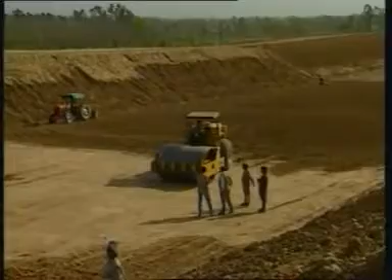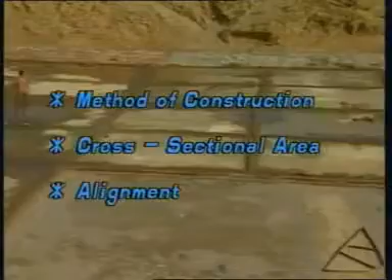This has resulted in human intervention with the natural channels and the development of artificial channel networks. These channels are classified according to their method of construction, cross-sectional area and alignment. The canal is a long and mild slope channel which may be lined or unlined.

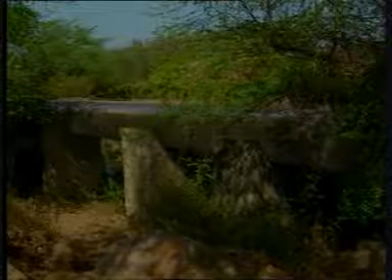The flume is a channel usually supported on or above the surface of the ground to carry water across a depression. A channel having a steep slope is called a chute. If the drop in elevation occurs in a short distance, the chute is then called a drop. A covered channel flowing partly full to drain water across the highway and railroad embankments is called a culvert. It could be rectangular or circular.

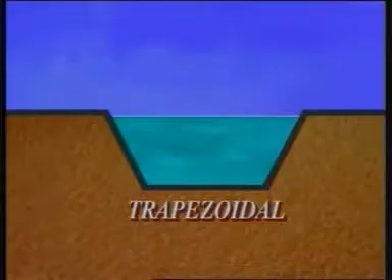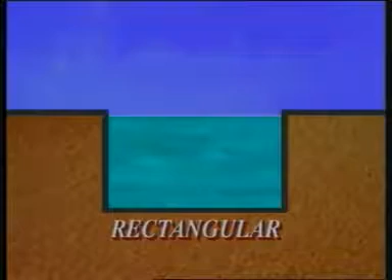You might have noticed by now that these artificial channels are designed with regular geometric shapes. The trapezoid is the most common shape for channels with unlined earthen banks. Generally, it has stable side slopes. The rectangle. Channels having rectangular cross sections are built of stable materials such as lined masonry, rocks or timber.

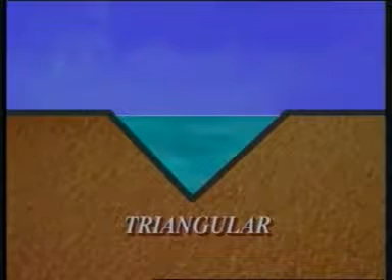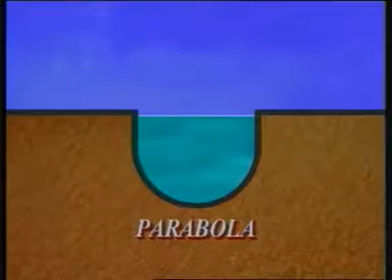Triangular sections are used only for small ditches, roadside gutters and laboratory works. The circle is a popular cross-section for sewers and culverts. In practice, other shapes are also used, where the sharp corners are rounded off. These are parabolas, round-cornered rectangles, and round-bottom triangles.

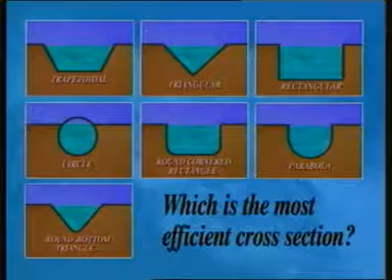Now the question is, which is the most efficient cross-section? The efficient cross-section is the one which, for a given slope and area, has the maximum carrying capacity. For such a section, the wetted perimeter will be minimum and hydraulic radius will be maximum. For an open channel, the semicircle is the most efficient cross-section.

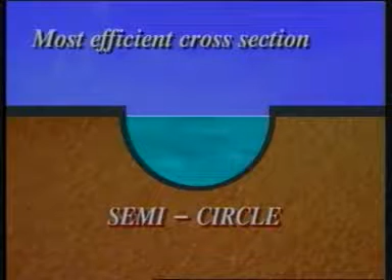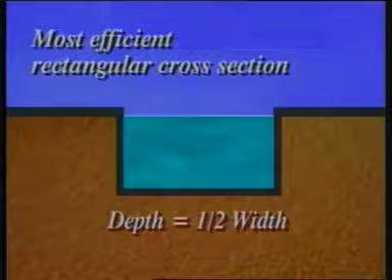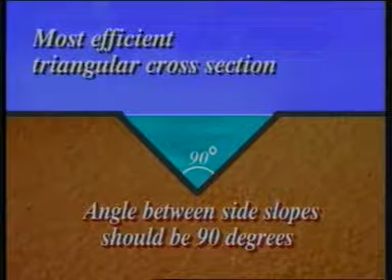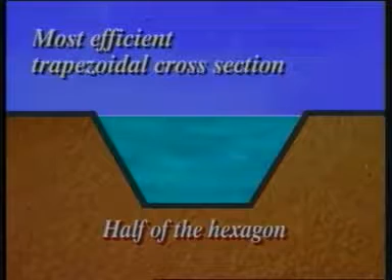However, if the rectangular cross-section is chosen, it will be half of a square, that is, the depth equal to half of the width, to make it the most efficient cross-section. If the cross-section chosen is triangular, the angle between the side slopes should be 90 degrees. But in practice, trapezoidal sections are mostly used to carry large discharges. Half of the hexagon is the efficient cross-section in this category.

The channels are aligned so as to permit gravity irrigation in maximum possible areas. The alignment should be such that it reduces the capital investments and maintenance costs and saves the transmission losses. Let us understand the alignment of canals with the help of a model.

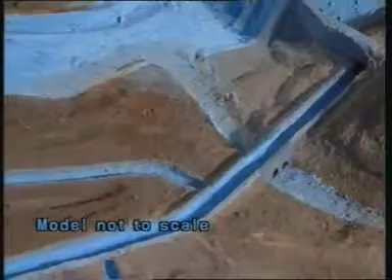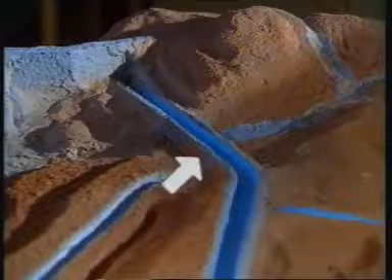Irrigation channels are generally aligned with reference to contours. A channel aligned nearly parallel to the contours of the country is called a contour channel. As some contours are higher on one side of the channel, a contour channel irrigates only the other side of the country.

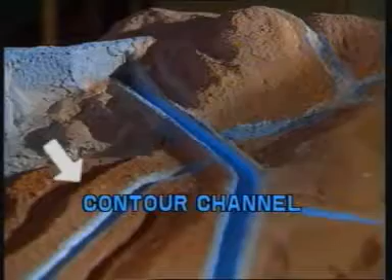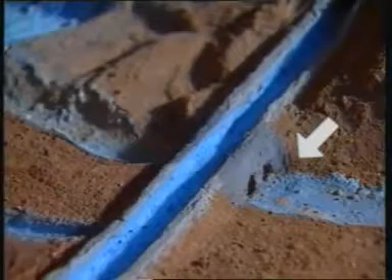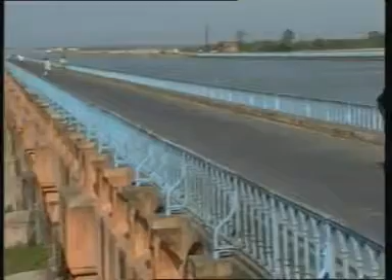While laying a canal system, we may encounter natural drainage such as a river which crosses the canal at right angles. When the drainage bed level is lower than the canal bed level, we construct an aqueduct to carry canal water. An aqueduct is preferred when the drainage is wide and of higher discharge capacity, and the water flows for longer durations.

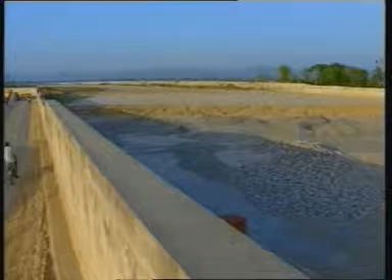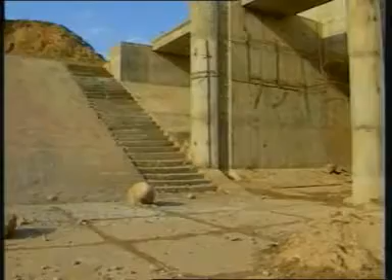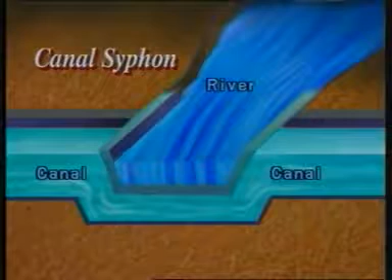But the situation may be reversed as well. When the bed level of the river is higher than the canal bed level, a super passage is constructed. It is a case when the canal is in deep cutting. However, when the headway clearance between the river bed and canal supply level is small, a canal siphon is built. The canal water is passed through an inverted siphon under the drainage, and the bed level of the canal is raised again on the other side.

If the river and canal are almost at the same bed level and the flood discharge is intermittent and large, it would be economical to build a level crossing with regulating structures. In this system, sometimes the canal supply can be augmented with river discharge.

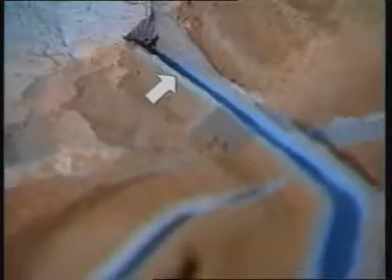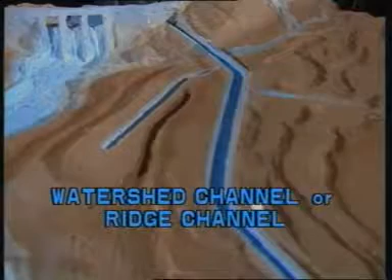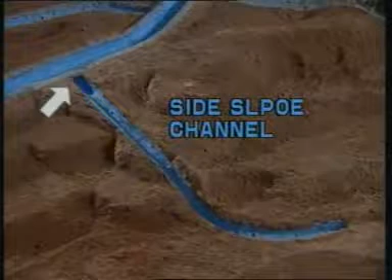After the head reach, a channel aligned along the ridge of a watershed is called a watershed channel. It can irrigate on both sides. Here, cross-drainage works are obviated. A channel aligned roughly at right angles to the contours is called a side slope channel. The cross-drainage works do not intercept this channel.

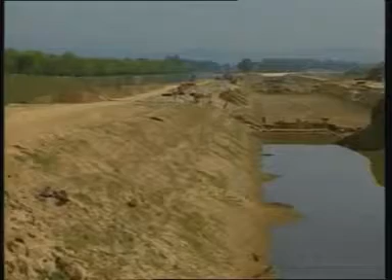However, in the alignment of the canal, there may be a situation where we have to avoid religious places, other monuments and villages. In order to avoid these obstructions, to fulfill topographical conditions, and for diversion works, curves in the channels are introduced. Curves in unlined canals are made as gentle as possible, since they lead to disturbance of the flow, and they also have a tendency to silt on the inside and to scour on the outside of the curve. For the same discharge, the radius of curvature for lined canals is less than for the unlined canals.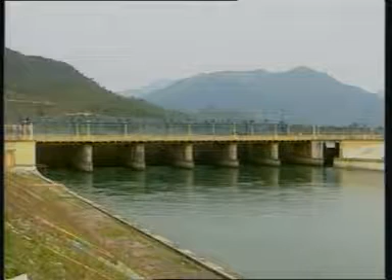Effectiveness of an irrigation channel network depends primarily on the command area it serves. Therefore, channels used for water distribution purposes require a high level at the point of delivery to serve the area under command without any difficulty. Normally, the channels with high discharge require less slopes than smaller ones. When the fields are high, adjacent to channels, water may have to be lifted from the channel.

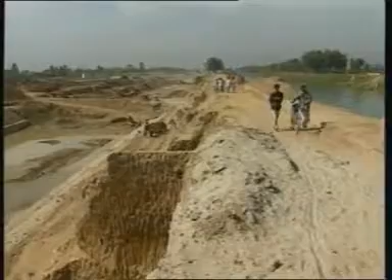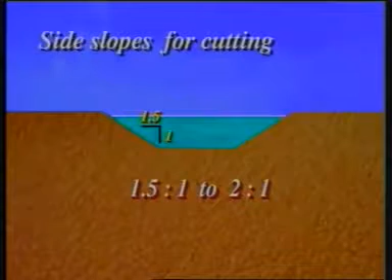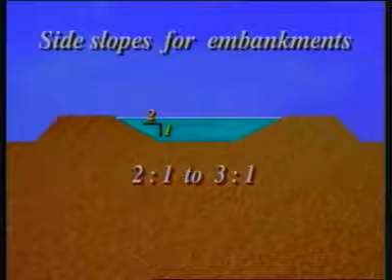The side slopes of the canal depend upon the nature of the soil in which the channel is to be excavated, depth of cutting, and the height of the embankment. Generally speaking, side slopes should be made as steep as possible and should be designed for high hydraulic efficiency and stability. The minimum slopes usually allowed vary from 1.5:1 to 2:1 for cutting. For loose sand embankments, the side slope ratio varies from 2:1 to 3:1. When canals are dug through rocks, the slopes are kept maximum, varying from 0.25:1 to 0.5:1.

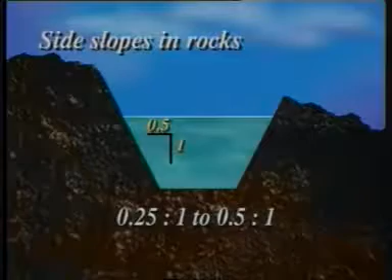In order to allow for fluctuations in water level, a freeboard is provided. The freeboard is measured from full supply level to the top of the bank. The amount of water that we feed in a channel does not all reach the fields. A major portion of the water is lost through seepage. The seepage losses constitute 35 to 50% of available water at the canal head. Seepage losses are considerably reduced by lining the canal. Lining also prevents water logging, weed growth, and reduces silting and erosion in the canal.

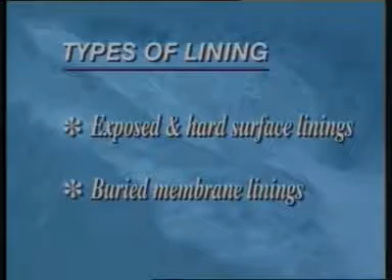Various types of lining can be mainly grouped into two categories: exposed and hard surface linings, and buried membrane linings. The initial cost of exposed linings is generally high. They are recommended for use where structural safety is the primary consideration. There are several types of linings. Thick compacted earth lining may prove to be economical where suitable material for construction is available at site.

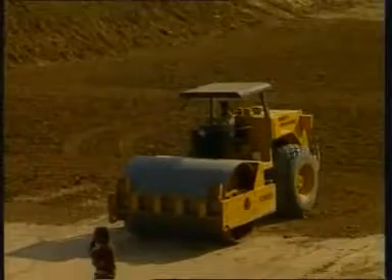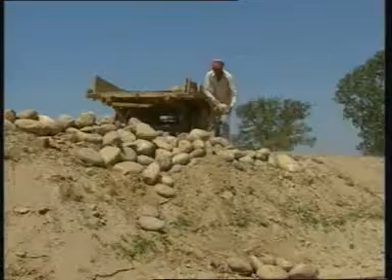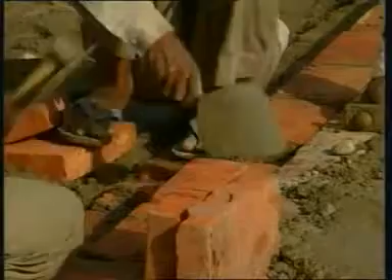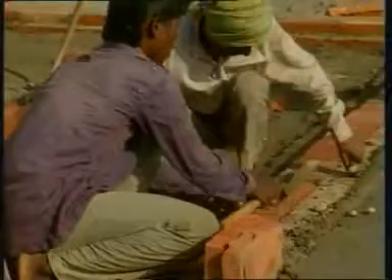Boulder lining is another economical lining where boulders obtained during excavation are readily available. It has very little flexural resistance or flexibility. Such lining is not satisfactory for canal in filling. Brick lining has been extensively used. It has the advantage of low initial and maintenance costs and quicker construction.

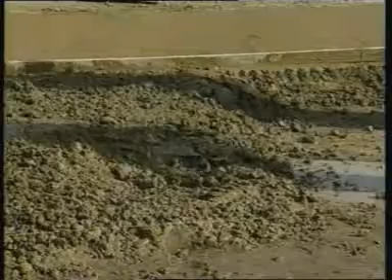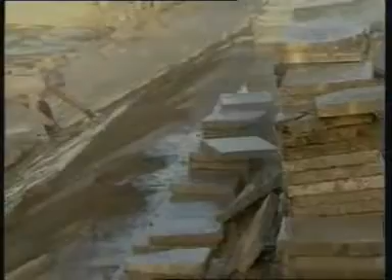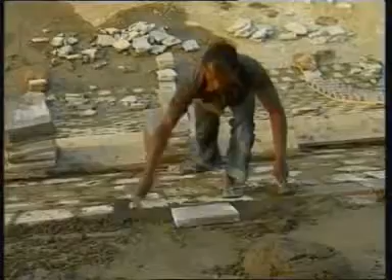Cement concrete lining is preferable because of its greater resistance to erosion and where the channel is to carry high velocity water. Precast concrete tiles are more compact and impervious. These tiles are laid in 1:3 cement mortar in single or double layers directly on the compact subgrade.

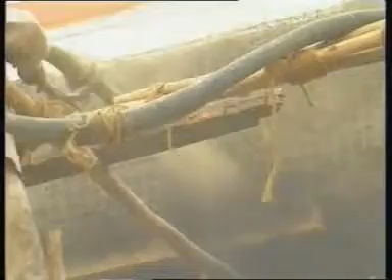In shotcrete lining, cement mortar is applied by pneumatic pressure. It can be placed over rough subgrade. Sandstone lining is used in field channels depending upon its availability and cost effectiveness.

Plastic film and a layer of bentonite protected by earth or gravel cover are cheap linings. These are commonly recommended linings. But the drawback in membrane linings is that it is susceptible to damage by weed roots. In this case, permissible water velocity is also limited in order to avoid erosion.

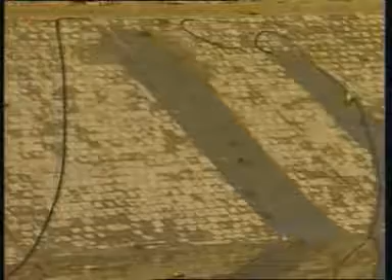Out of so many types of linings, what are the criteria used in the selection of a lining? We put this question with reference to the modernization of the Upper Ganga Canal to Shri R.C. Goel, Chief Engineer, Irrigation Department. The basic criteria are two: costs and the time that we use in their construction.

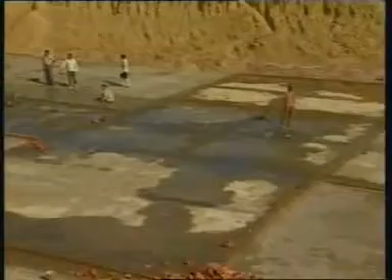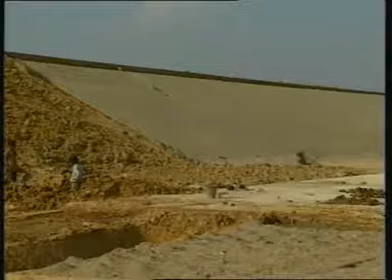As I said, concrete lining is definitely faster to do when we do it in bed. And cost-wise, concrete lining in the bed is a little cheaper also. But if we were to do concrete lining on the slopes, though the materials cost would be comparable, the labor cost would increase because it needs shuttering and all that.

Initially, we started with concrete lining because we had the experience of it and it could be readily started. Then later on, we established a factory for concrete tiles. Side by side, we started a new kiln factory to build up clay tiles.

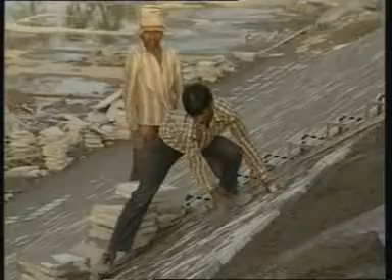In fact, in this area, ample aggregates and sand are available in River Ganga, but concrete tiles are not as impervious as the clay tiles. Clay tiles are definitely far better in respect of abrasion and imperviousness. So now we are doing concrete lining in the bed, and on most of the slopes we are having double tile, clay tile lining.

By making a new lined canal, we are saving very substantial quantities of water to the tune of 240 million cubic meters, which will result in very substantial increases of agriculture production.

Now, the water is to reach the fields. For this purpose, we have a canal irrigation network. A canal which takes off directly from the headworks is called the main canal. Normally, no irrigation is carried out from a main canal. A canal taking off from the main canal is called a branch canal.

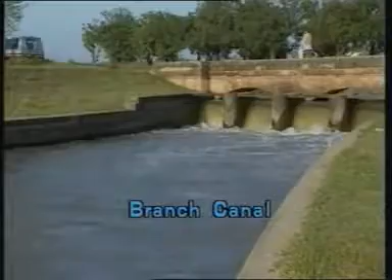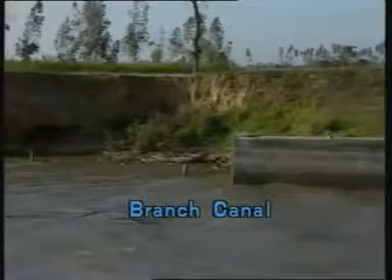Distributary channels are taken off from the branch canal and sometimes from the main canal. A distributary can be a major or a minor, depending on the discharge. Water courses are small channels, generally constructed by cultivators themselves. They run from outlets provided in the distributary channel and convey water to field channels.

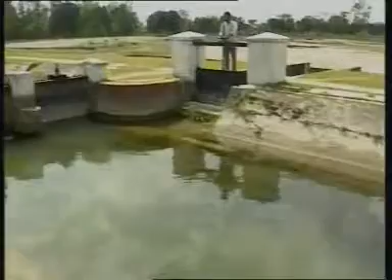For water distribution, it is necessary to adjust the discharge in a channel to any known value. This adjustment is carried out by the regulator at the headworks. In this process, sometimes it becomes necessary to run a group of channels at a time and to keep the remaining channels closed. This process of rotation is known as rostering, and the whole process of distribution of water to branches and minors is termed canal regulation.

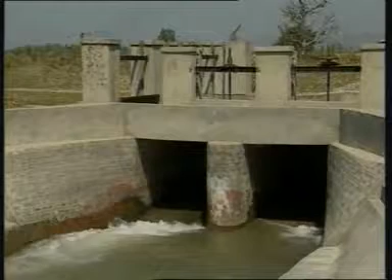In spite of regulation, the irrigation channels do not always draw their desired discharges because of silt deposition, which makes the channel shallow. Therefore, the success of an irrigation project also depends on control of silt and weed roots. In a canal, silt is removed through a silt ejector which is constructed in the head reach of the canal, a little downstream from the offtake.